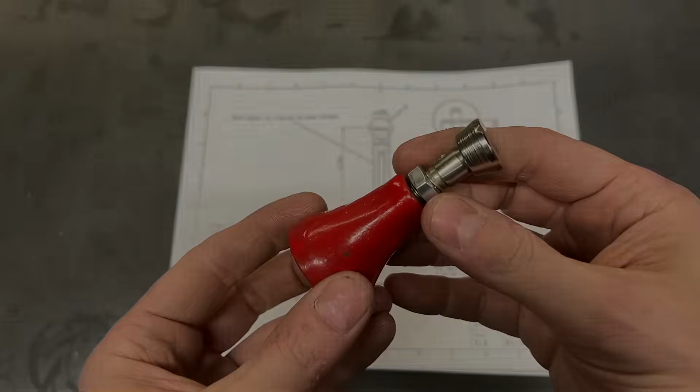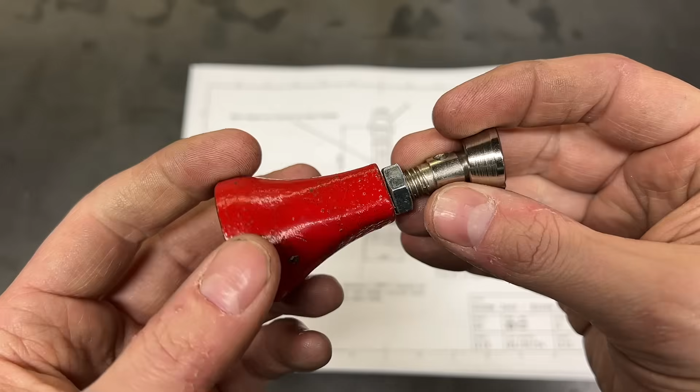So in case you're unfamiliar, this is a screw jack, or a machinist jack. It says so on the box. In fact, this is my machinist jack. There are many like it, but this one is mine. Machinist jacks have a lot of uses around the shop. You can do all sorts of stuff with them. You can even use them to level machines.

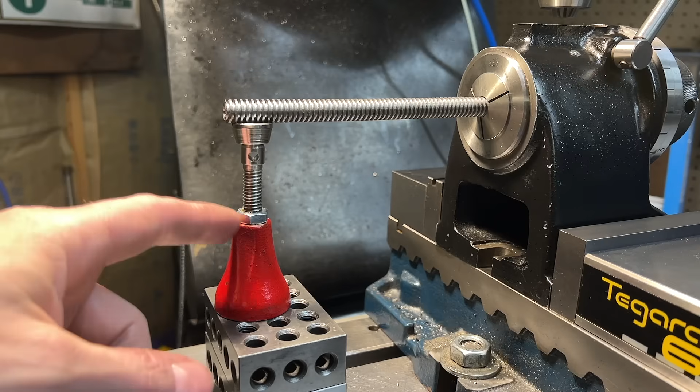However, I think when most people think about these, at least when I think about them anyway, I usually think about setups on the milling machine. A small jack like this is often used when performing cutting operations on long, thin parts where the force of those operations might otherwise cause the part to flex. For example, with this jack here, I can push down on this thing as hard as I want and it's not going anywhere. But if I remove the jack, it's very easy to cause it to flex.

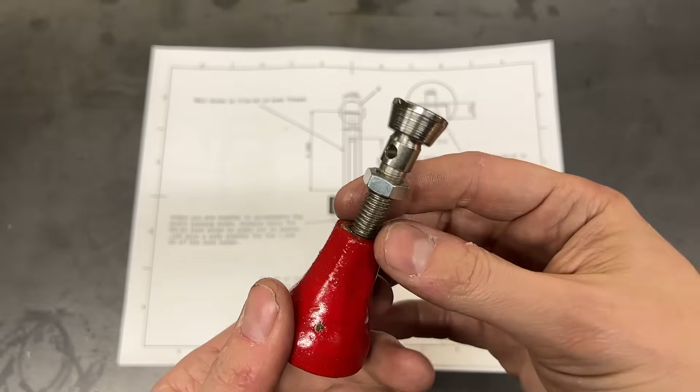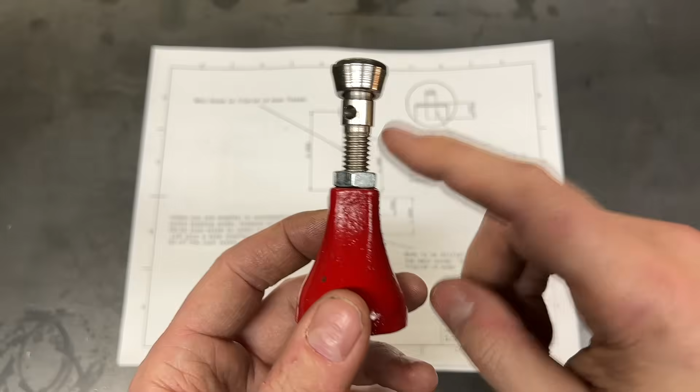The way this particular jack works is you have this jack shaft that just screws directly into the base, and then when you get it to whatever elevation you need it at, you'll use this lock nut to lock everything down. In theory, that's simple enough, it works well enough. However, it's always been a little bit fiddly, and sometimes it can be downright frustrating getting this thing just where you need it. Also, I would ultimately like to have two or three more of these anyway, so I figured while I'm at it, why not try and improve on the one part of the design that's always bothered me.

So that is what we're going to do. I have my design here that I hope improves on some of those shortcomings. We're going to put it all together and find out how well it works.

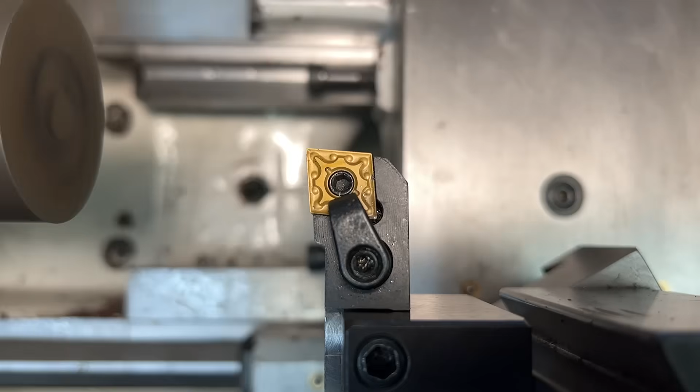Let's get started. I'll get started working on the main body of the jack. For that, I have this piece of 1144 stress proof. I don't think that material selection is terribly important here. However, I would avoid lighter materials like aluminum, for example. You do want this thing to have some mass and some weight so that it sits still whenever you set it down on your mill table.

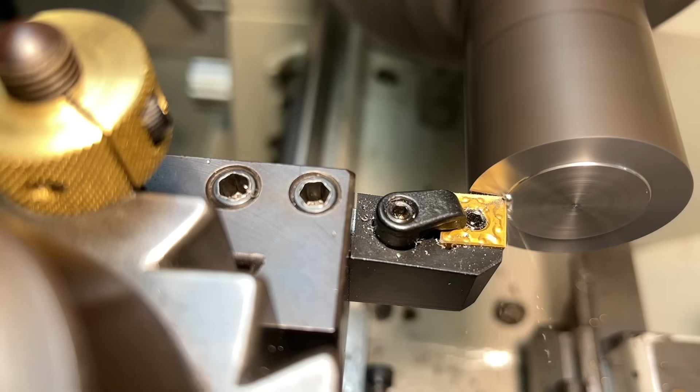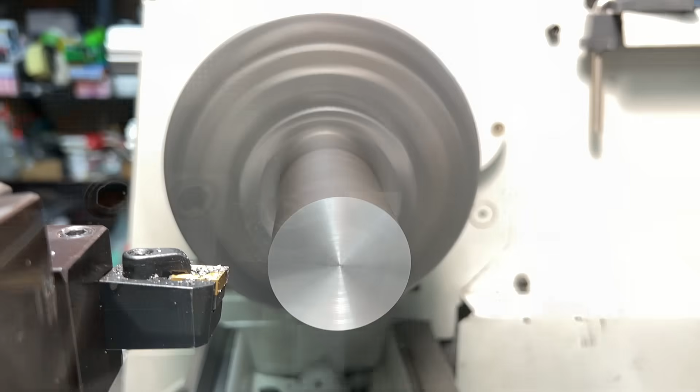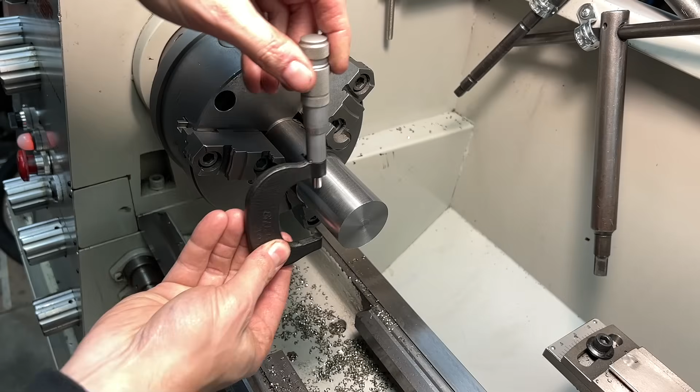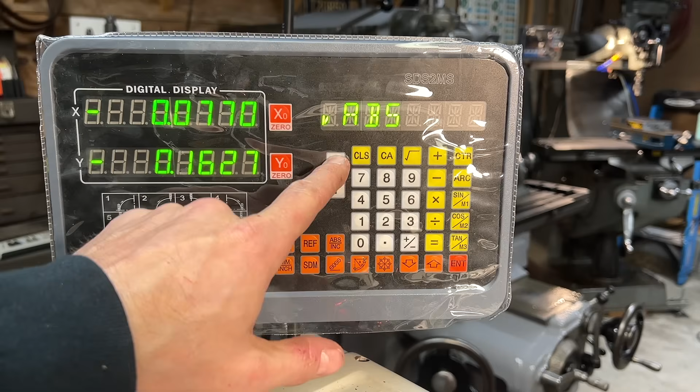Next, the outer diameter needs to be turned down to 1.5 inches. After the initial pass, I can take a reference measurement, which I can then enter into my DRO and use that as my starting diameter. I can then just keep turning until my DRO tells me that I've hit my target.

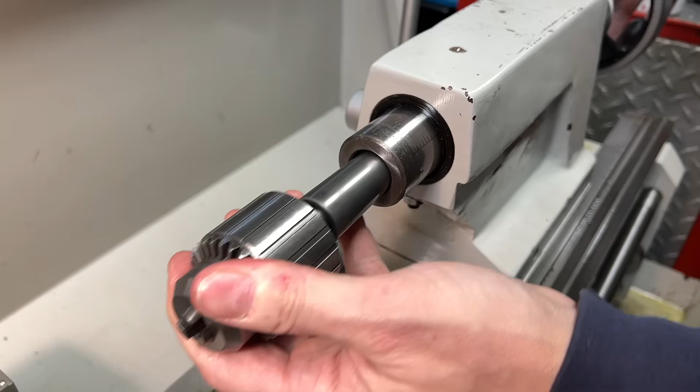Next, I need to drill a bore through the center of the part. This bore needs to be a clearance bore for the main screw, which we will make later.

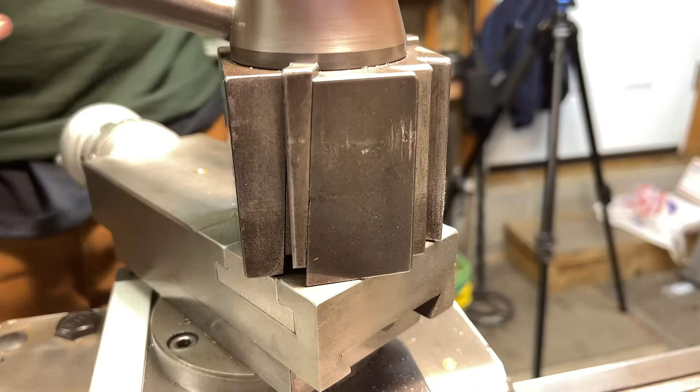In this particular design, the screw shaft is going to be moved up and down via an adjustment collar, so you won't turn the screw directly. That adjustment ring is going to sit in a counterbore at the top of the main body. So I need to bore that out to 1 inch in diameter at 1/2 inch deep.

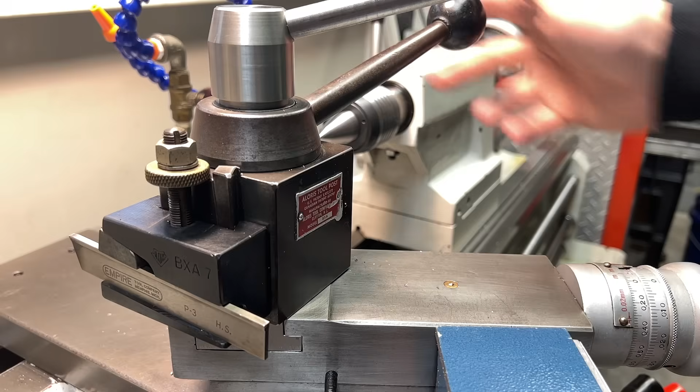After breaking those sharp edges, I am now ready to part this off. I'm going to leave myself about 50 thousandths of extra length on the back side, just so that I can flip the part around and clean up that back face, which is going to be the bottom of the screw jack when it's all finished.

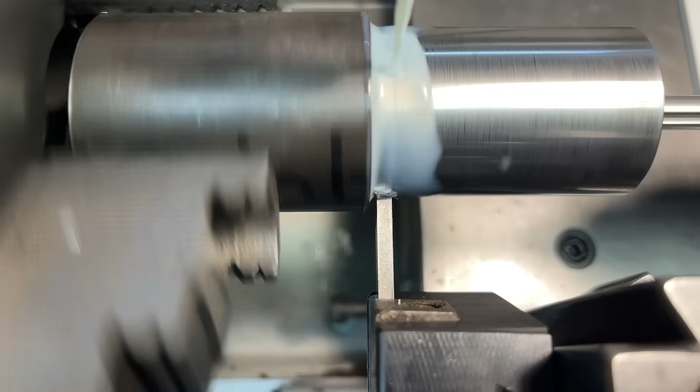I was getting a little bit of chatter while parting off, which causes the camera to go completely out of focus here. What I wouldn't give to have a camera person.

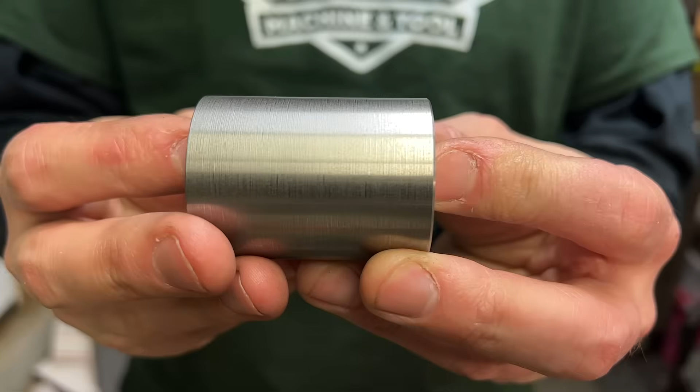Alright, all I have left to do now is drill and tap a couple of holes, and this piece will be done.

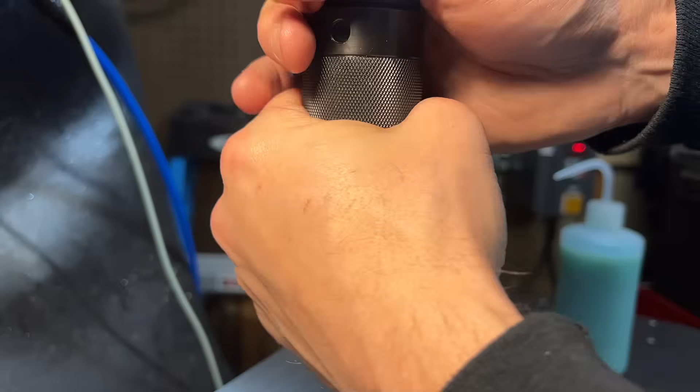Both of these holes are going to be tapped for 8-32, and the screws that go in these holes are going to act as keys, which are required for the screw jack mechanism to function as intended.

The tap follower that I made in my last video is already coming in handy.

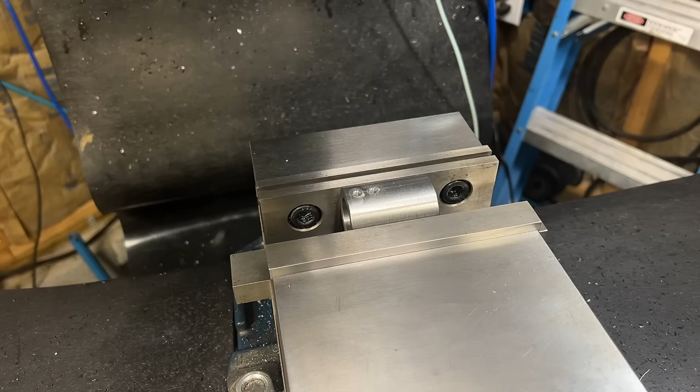Alright, so here is the first piece all finished. This is the main body, so that's this piece right here.

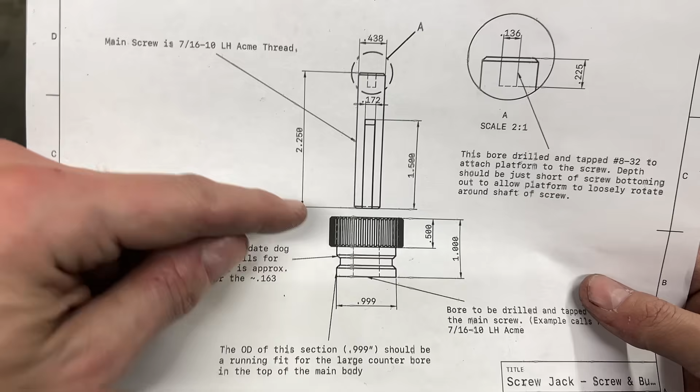And next I want to work on this piece, which I am calling the adjustment ring or adjustment bushing. There are two sections to this: a top section here, which is knurled, and a bottom section, which will fit right in this recess in the top of the main body.

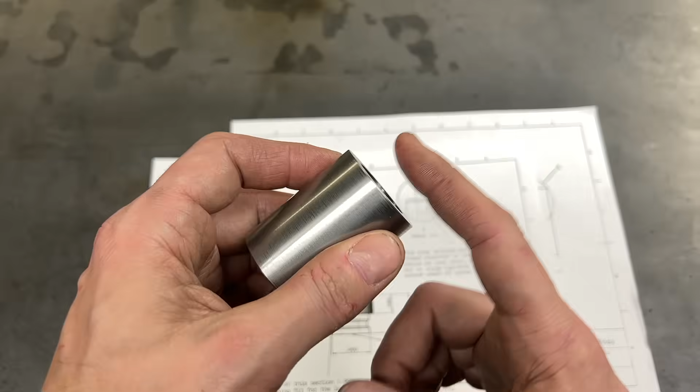So that knurled section will be sitting right out here, and by turning this ring in either direction, you will cause the main screw to either move in or out. This thing also will need to be drilled and tapped for the main screw. That's really all there is to it, so let's get started.

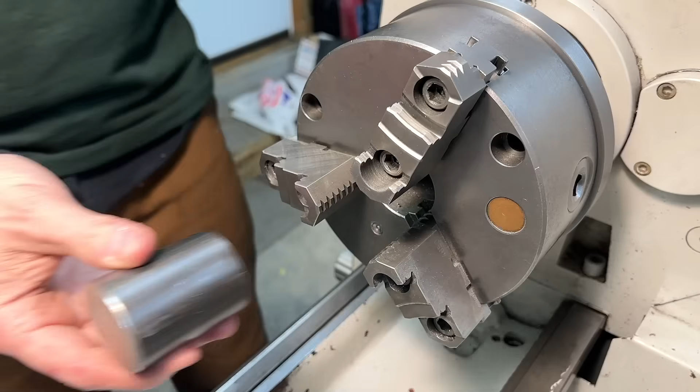To make this adjustment bushing, I will be using the rest of this 1144 stress-proof stock that I used to make the body. To start off, I will rough out the general shape, and take the two sections down to their finished diameters.

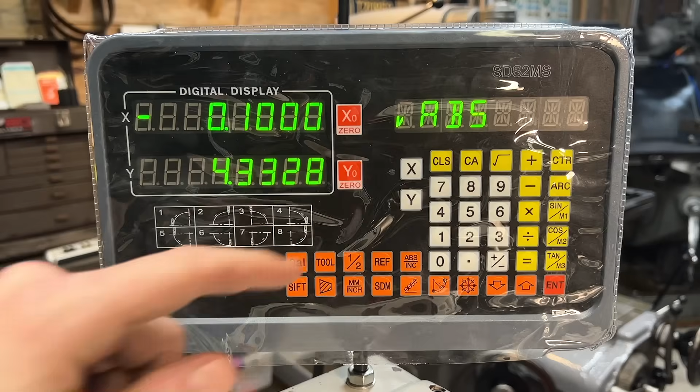Like before, after an initial pass, I can take a reference measurement, which I can then enter into my DRO, and use that to keep track of my diameter. I am really starting to be glad that I finally got around to installing this DRO. The more I use it, the more it becomes part of my workflow, and it really is a handy tool to have on the machine.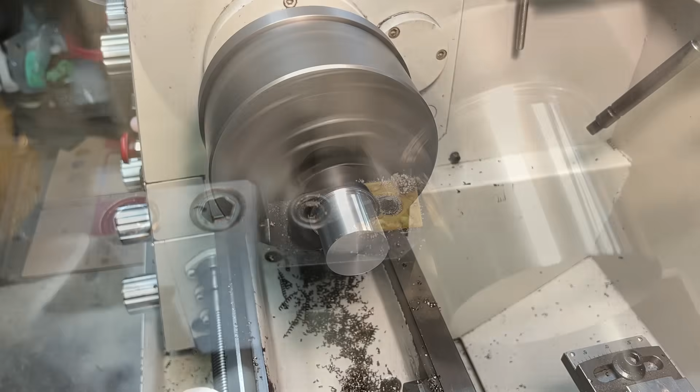That is the finished OD for what will be the knurled section. Next, I need to turn down the section that will fit inside the recess of the main body. Turning down this section will also rough out the general shape of my part.

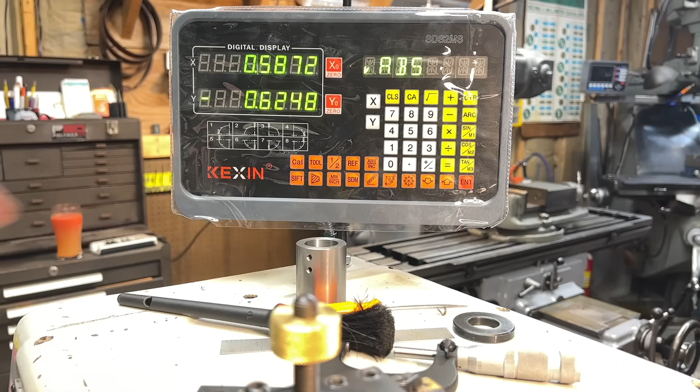Now I need to locate the groove that will line up with one of those tapped holes that we added earlier. This groove is going to interact with the thumb screw that goes in that hole, which will serve as both a key and a lock for the adjustment ring.

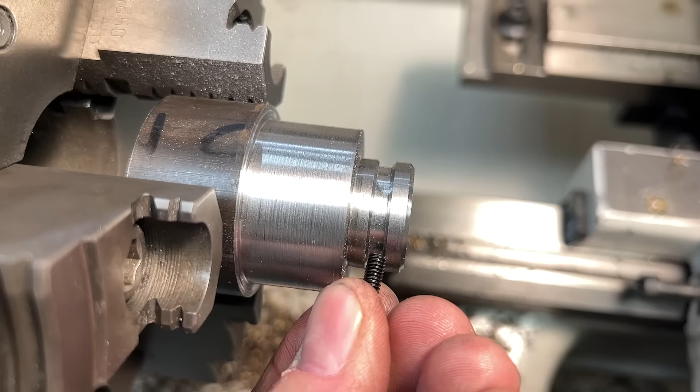Just checking the fit of my 8-32 screw. It needs to sit in that groove and hold the adjustment ring captive without obstructing its ability to spin freely.

Next, I will drill the bore for the 7/16 tap that I'll be using to tap this part.

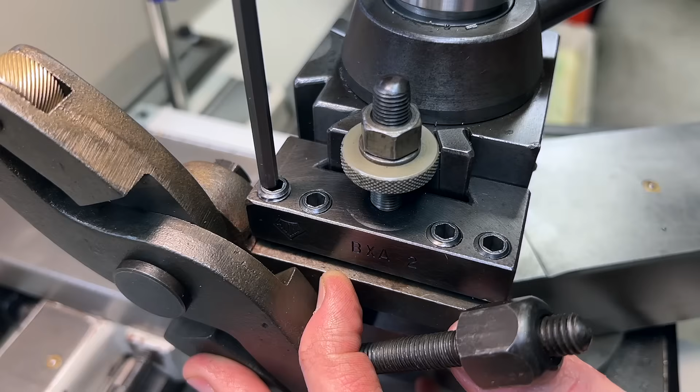Next, I just need to add my knurled feature since this part is intended to be manipulated by hand. Of course, I'm going to use my scissor knurler here, which honestly I wasn't sure was going to be big enough to do this part, but thankfully it was, and I think it could even go a little bit bigger. I really like my scissor knurl.

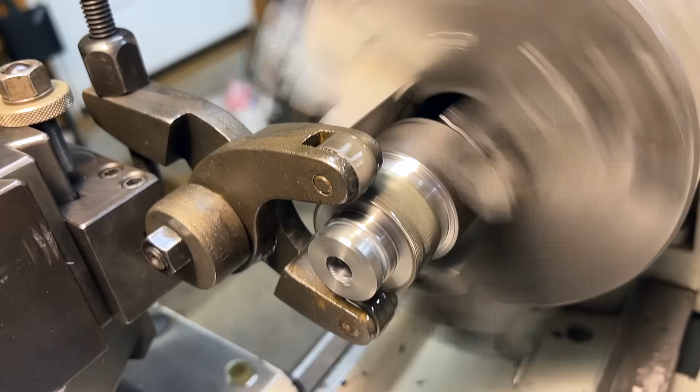The knurling pattern came out pretty nice here. I would like to get some coarser wheels for this knurler. All that I have is this fine wheel, and I think something a little coarser may have been better for this material, but it came out all right.

And with that finished, I'm ready to just clean up these edges here, and then I can part this off.

So this just happened in the middle of that parting operation. Look at this. Look at that, it just pushed it right out. You know, I normally don't use these Aloris style cutoff tool holders, and this is exactly why. I have had this exact issue in the past. I don't know what possessed me to use this one. I don't know what I was thinking, but these things stink. They are the worst, and it's the whole reason why I made this one in the first place.

So yeah, that just happened. Kind of a pain in the butt, but I guess I'll put this one on and finish up this operation. I don't know, I just wanted to show you that. These things stink, don't use them. I think I'm going to throw this one away.

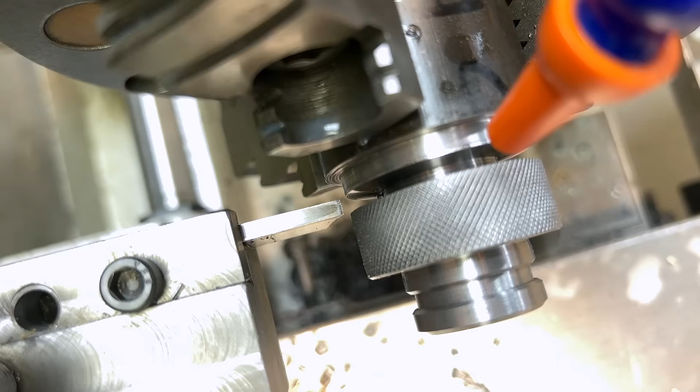And one more quick thing here. You can see how much smoother the rest of this parting operation goes with this tool holder. I think that other holder may have been at least part of the reason why I kept getting chatter in parting operations earlier.

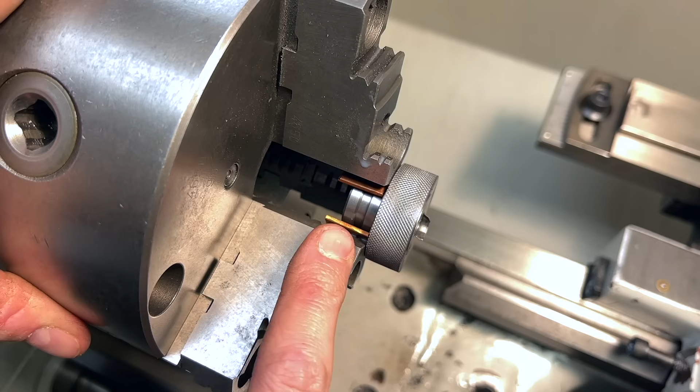I'm using these little 1/16 of an inch copper pads here because they let me really crank down on the chuck and hold on to this thing really tight without having to worry about marring my nice machined surfaces.

And with that done, this part is getting really close to being finished. I just need to clean up this back face, take it down to its final size, and I'm also going to give that central bore a nice generous chamfer, which is going to help me get the hand tap started.

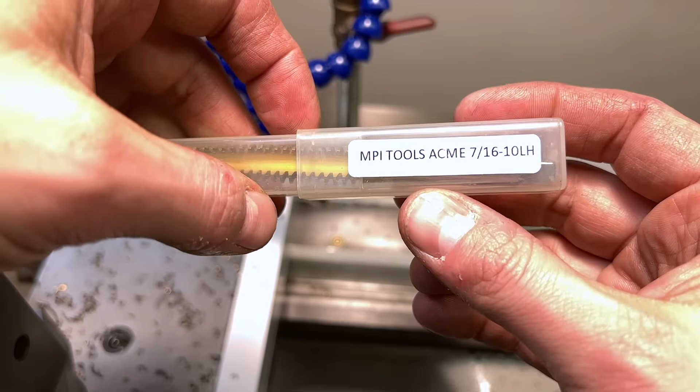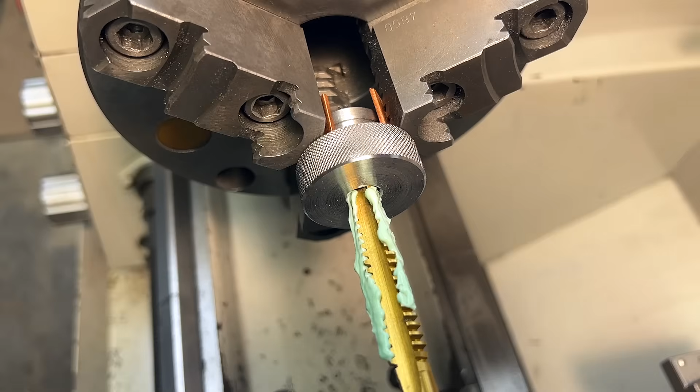I will be using an Acme tap to tap this central bore. And if you've ever used an Acme hand tap, then you know that these things require some muscle to get them through. So I am going to be relying on the machine here to provide some leverage to help me with this. Having this in the lathe and being able to use the chuck and chuck key to get that leverage really makes this a lot easier.

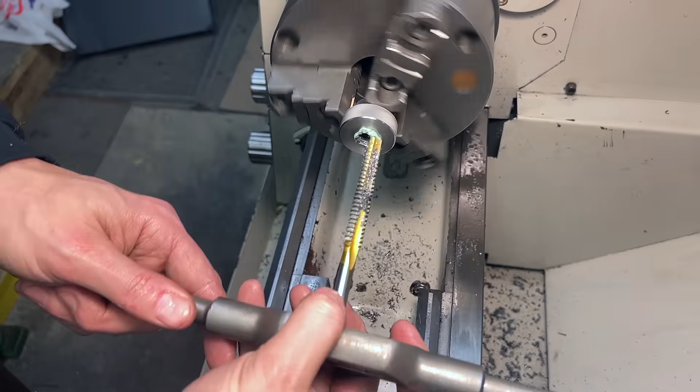All right, there it is, the second piece of the puzzle, the adjustment ring or adjustment bushing, whatever you want to call it. I think you can start to see how this is going to work here. This piece is going to fit right in this recess in the top of the base.

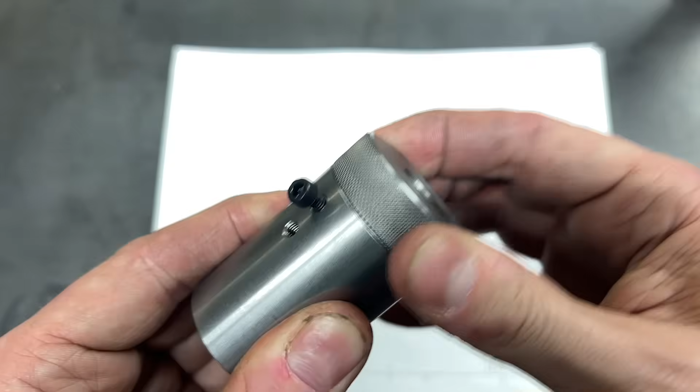This top hole that I drilled and tapped lines up with this groove in the side of the adjustment ring. So I put that down in there, and then I take a screw and put it right in here. I don't know, maybe I'll make a nice brass knurled thumb screw for this piece if I have time. But if I put that in there, it will lock this in place so I can't pull it out, but I can still spin it freely. It's been tapped 7/16-10 left-handed Acme.

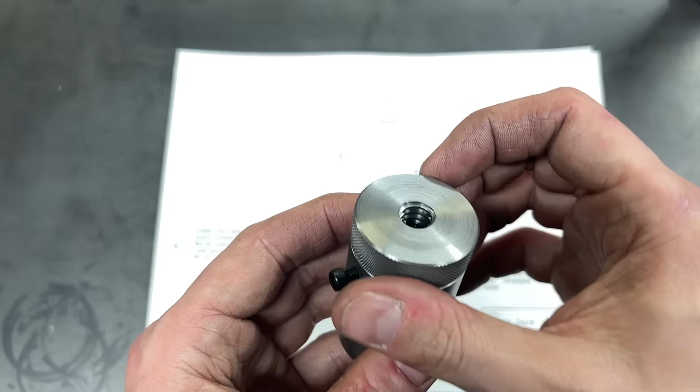The idea is that when I turn it clockwise, it will cause the screw to push out, or the jack to move up. If I turn it counterclockwise, it'll cause the screw to retract into the base, making the jack go down. From a use perspective, that makes sense to me - it would feel right that you turn it clockwise and it extends. So that's why I tapped it left-hand, and it seems to be working the way it's supposed to, so that's good.

That's not going anywhere. It spins nice and free. The other thing is this screw - if I tighten down on it, that will lock this thing in place so it'll lock your jack wherever you have it. I just loosen it back up and I can spin it freely again, and it's not going anywhere. Maybe I will make a nice knurled brass thumb screw - I think it would look good there, but in terms of functionality, it seems to be working pretty good. Works the way it's supposed to.

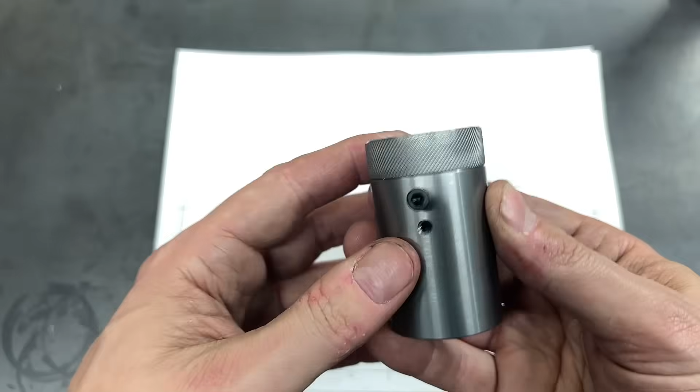I'm liking the way that it's looking. It's chunky, it's got some weight to it, which I think is a good thing for a jack like this. I kind of wanted it to be heavy, so I'm glad it's got some heft to it. I'm pretty happy with how this thing's shaping up.

Unfortunately, I am out of time for this week, so I am going to have to wrap this up here. If you want to see the exciting conclusion, you'll just have to tune in next week. That is where we will make the main screw and the platform - that's the part that actually touches the work that sits on it. And of course, we'll put it all together and see if it works.